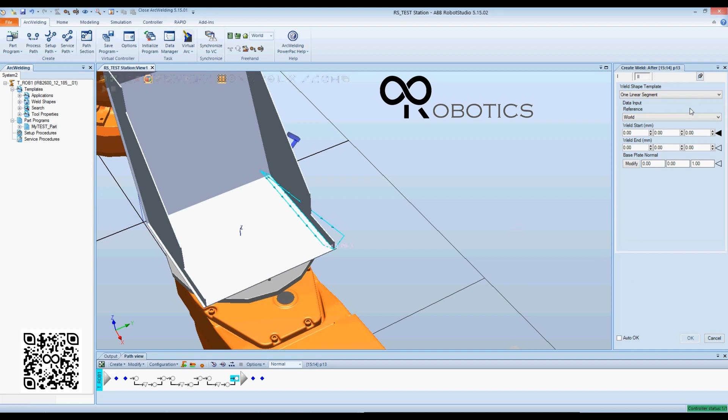So that's for creating linear segments. Now I'm going to go through to create circular segments. So to be able to create a circular segment, I've got to bring in something circular. So I'm going to bring in a new part, or a part that I created. Control J, circular. Open it up, and I'm just going to go on the Home tab and attach it to my positioner.

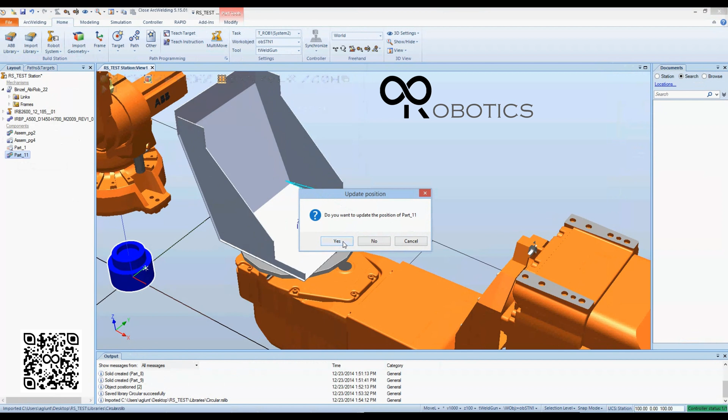Do you want to update the position? Yes. And that looks good there. So I'll hide this part, right click and hit V. So right click, visible, or right click V. I'm going to go through and just change some colors here too, really quick.

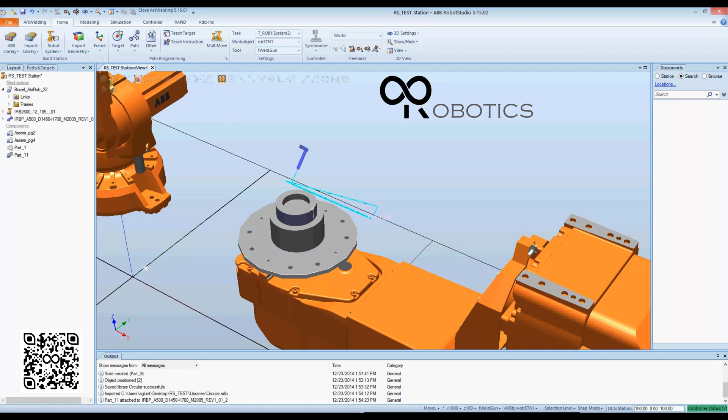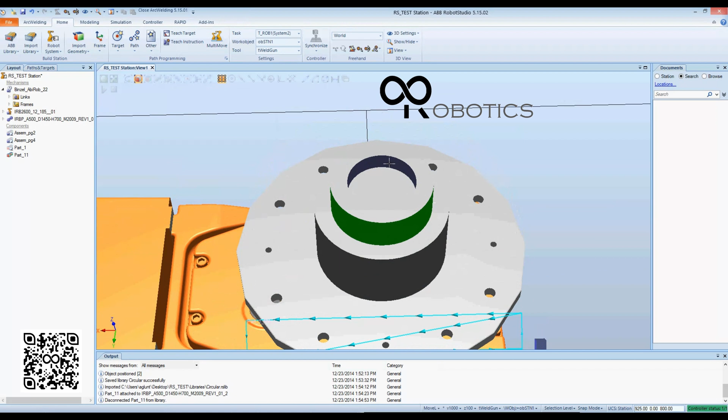So this is all one body on this part, so I'm going to right click this and disconnect the library so I can actually change the colors. Disconnect the library. So right click here, set color, make it green. On this inside, a little green as well. That surface there, and that surface there, and that surface there.

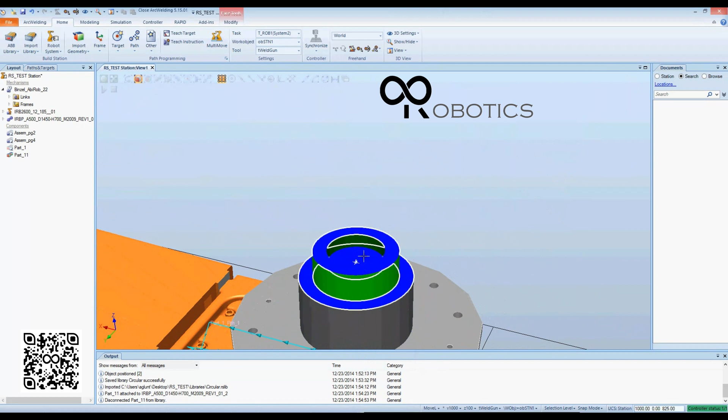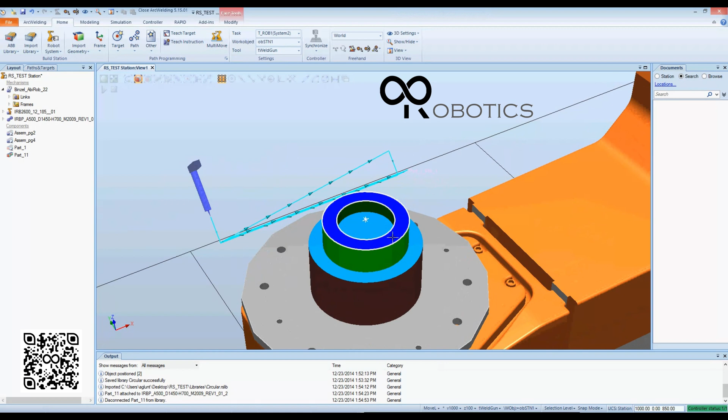We'll make colors orange, and actually we'll change that so it doesn't match the ABB color orange, or not as close at least. We'll choose a blue, and then this we'll make another color just so we can distinguish it from the platter a little bit better. Set color, make this brown. Okay, so these are our colors, and we might change this color just so it's a little more distinguished. Maybe a dark color. Okay, so there we go.

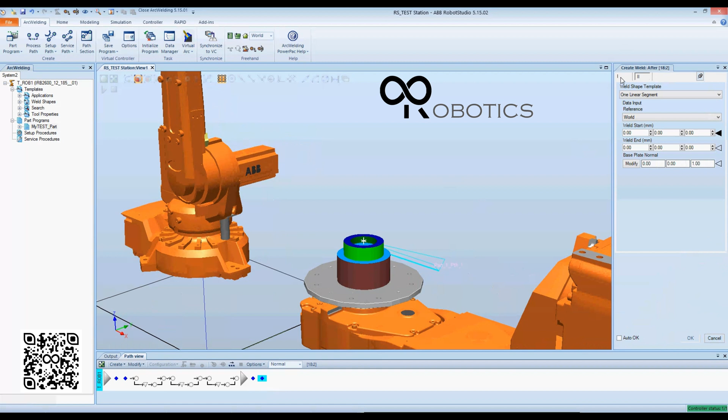So now to make a circle, I'll have the circle done in this path. As soon as I clicked here, that screen automatically closed. So create weld instruction. This is all set up still, since I haven't closed ArcWelding. I'll go to multiple circular segments. Usually if you're going to weld all the way around the circle, you want to start closest to the robot to have the torch wound up a little bit and then unwind as you go around.

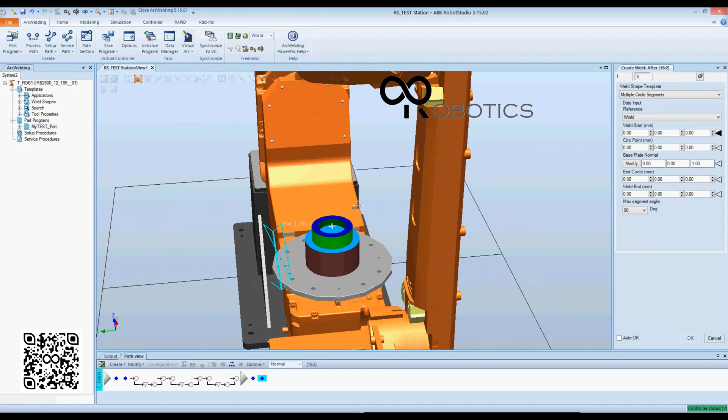So I'm going to start here, and when creating a circle, you've got 5 points to select from: a start point, a circular point, a base plate point, an end circular point, and end weld. So now, as I click here, there's the start point. That's where you want to start the weld. The circular point is just a reference of direction for where you want this circle to be going. So you select there. The base plate is the base plate you want to select, and depending upon where you select is going to change your torch angle.

So select there. End circular point. This end circular point does not mean the end of the weld, it's just the end circular point. Usually I do these first 4 within the first 90 degrees. You can even do it closer. I messed around with it a lot to see how close I can get them together before it messes up and does something different. So just within the first 90 degrees, these first 4 points, and you're fine.

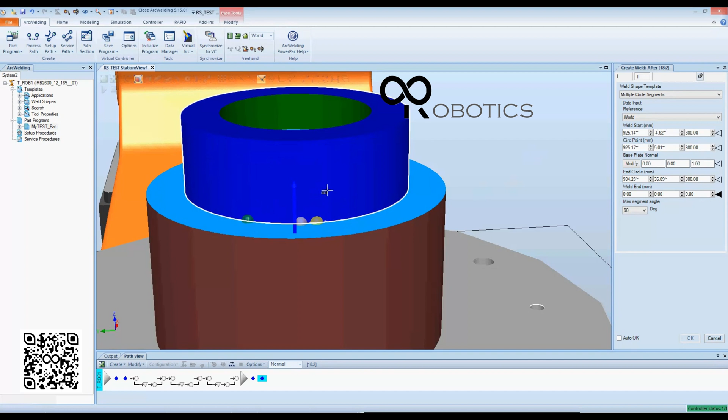And then the last point, the only thing it cannot be is at the exact same point as your first point. That's the only thing. You can have it over, you can have it under, doesn't matter, it just cannot be the exact same point. So I usually pick something right on the outside of that circle.

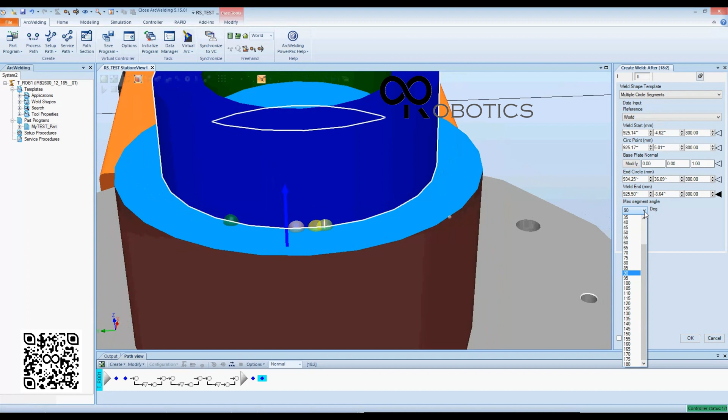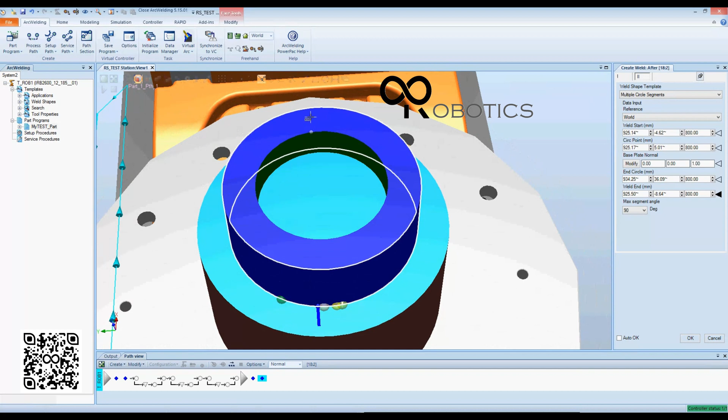And then here, this 90 degrees sets up how many sections you want it to be. You can increase the number of sections, so every 60 degrees you'll have your start point, and then every 60 degrees you have 1, 2 points, another 60 degrees, 1, 2 points, and so on. Or you can have 90 degrees, so you have your start point, and then every 90 degrees you'll have your circular point and end circular point, till the end of the weld.

So 90 is a good default. You can do less, you can do more. As the circles get bigger, or as the parts of your welding get bigger, I usually put more points in there. As they get smaller, I'll put less points in there. But you cannot go 180. It has to be less than 180, because otherwise, when actually welding it, you'll probably run into issues. So 175 if you've got really small stuff.

But 120 is probably pretty good. So then it'll cut it up 120 degrees, and so there, there, there, and then end. So it depends upon what you want to do. I'm going to leave the default and go 90. This auto OK button usually doesn't work. It might work, I think when you create work objects, but it'll actually close the screen, so it defeats the purpose of having this up here.

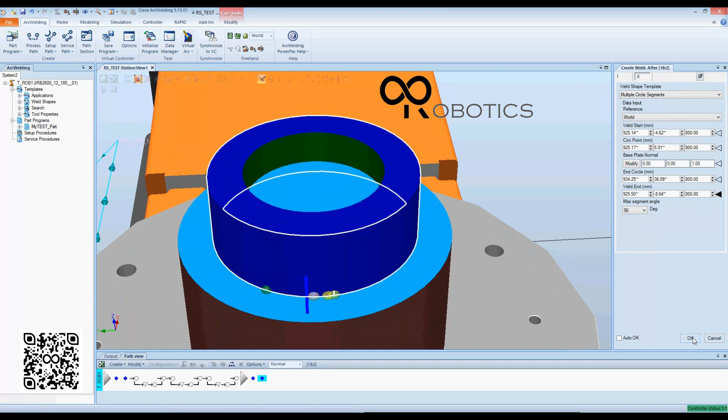And so since I've got this all set up, this OK button will only highlight once everything's been selected. Once it's all selected, I can hit OK, and I've got a path that goes all the way around, and I'll step through this, and I'm just using the over arrow as I step through this, and you can see what the path looks like.

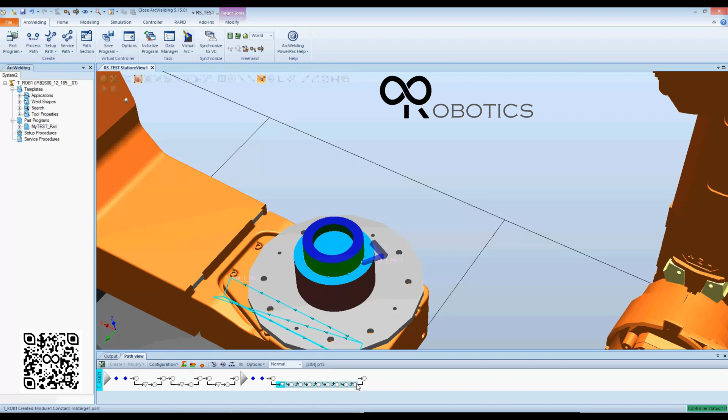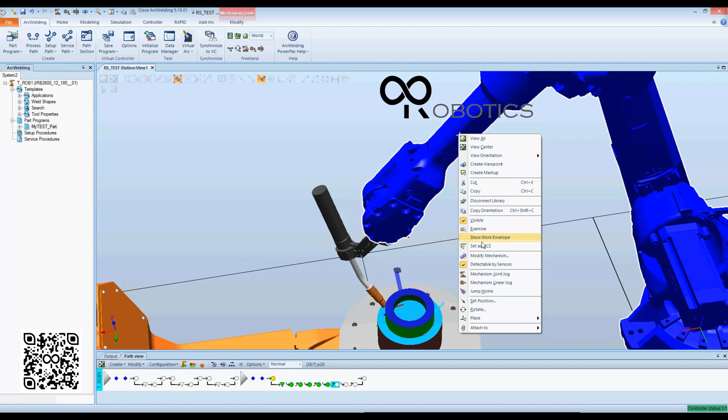So now to step through this path, you can shift and click all these points and hit move through and see what the torch looks like as it goes around there. Move to failed. Now the robot can actually reach there, but you're seeing this move to failed. Since I've got a quick tab up here, I can change this to mechanism, right click the mechanism and go mechanism joint jog. You can see that axis 6 is maxed out, so there's no more rotation around axis 6. So when doing circles, that's something you have to pay attention to.

And so you can go through and set the configs. So we'll go into configurations now with this circle. With a circle, or with any move, configurations can only be set on J moves. They cannot be set on L moves, because if you set them on an L move, as soon as you move from a J move through that L move, it'll automatically be overwritten by whatever the J move's configuration is.

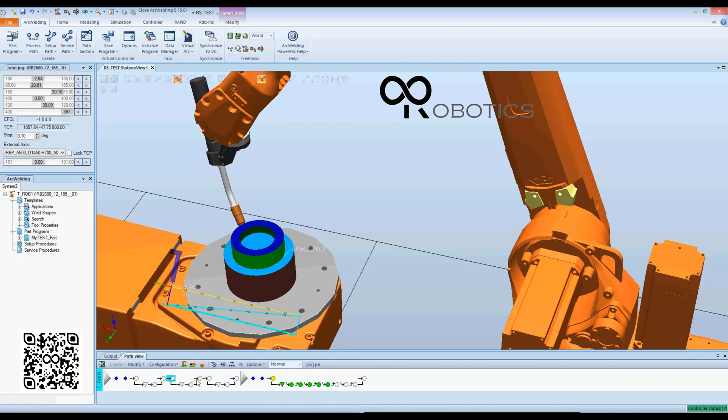So to set the configuration, I'm going to go to this J move. J moves are these little squiggly lines. L moves are straight lines. I can change these from modify, convert to linear. So there's a linear move. These end ones are linear moves as well. So this J move here, I'm going to go to configurations.

This button right here, set configuration, and these 3 buttons all pull up the same exact screen. So just pick any one of those, and as soon as you do that, the robot's automatically going to jump there, because with this config open, the robot will check the reach and jump to these points. So you can see from here, the robot actually can reach that point, but it said it couldn't. The reason why is because of this axis 6 value up here.

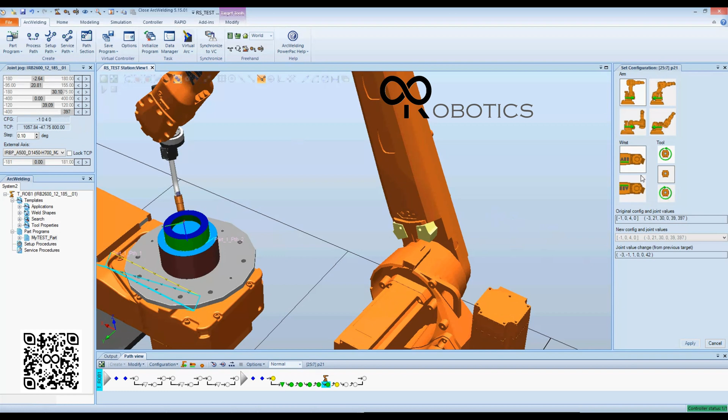So to set the configuration, I'm going to go to the J move. It's going to jump to it, and I'm going to set this configuration. This will tell you what the robot's approximate axis values are at this point: 0, 10, 42, 0, 38, 176. So I'm just going to make this a negative number. You pick this down, and then you've got a list of values here you can choose from. I usually try to minimize these numbers and then get the result that I want.

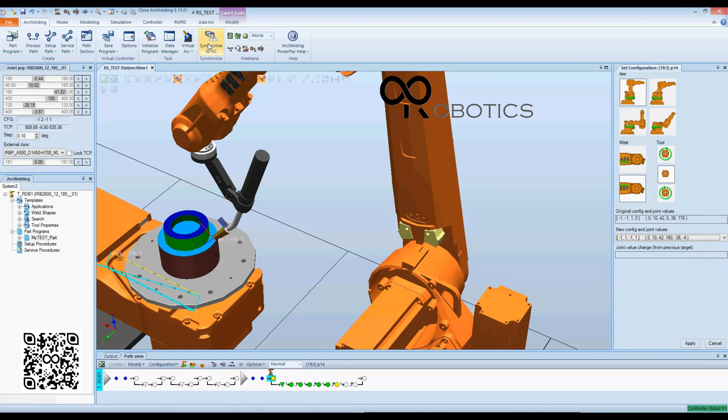The other thing is axis 6 most negative. You've got quick buttons to be able to do this. So I hit this, and see how it automatically jumps to the most negative value. You can go closer to 0. It isn't actually exactly 0, but the closest to 0 within that configuration. So you've got ABB up, ABB down. You can see what this does here. This is flipping axis 4. This flips axis 6. You don't see it except from this screen over here.

There's other things you can do if you have the ability. Some points you've got some weird configurations that you can use to get to those points. But I'm going to use ABB up. Generally that's what we like. And then I'm going to make axis 6 a negative one. You can either use these quick buttons, or you can use the drop down list to see what you want to do, and then hit apply.

So now you have to be careful though when you do set this up, and when you program, that when you move through these J moves you're twisting up this torch axis here. So I'm going to see what this move does here. So that one did okay, it didn't twist it up, but if I made this a positive one, let's just see what that does. As I moved to there, that torch flipped all the way around, and so it wound itself up, and then if I was going to start going around here, it won't make it because of that, and now it's starting to wind itself up more. So that's one thing you have to watch.

So fixing that config to make it a most negative also helped me with that. So I'm going to move that back, make it a negative, and shift and move through those again. So I go from there to there, and it looks good. So that's doing a circular move, and so I'm going to do another circular move on the inside here now.

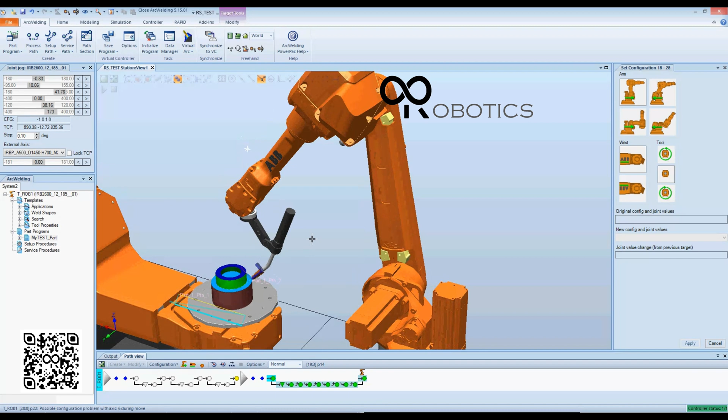I'm going to close this configuration screen and go create weld instruction, multiple circular move. And here I'm also going to start close to the robot, and I want to go the other way around now. So if I just wound up my torch, now I want to unwind it. So I'm going to go here, here, base plate, there, and then somewhere there. So there's my 5 points, and then hit OK.

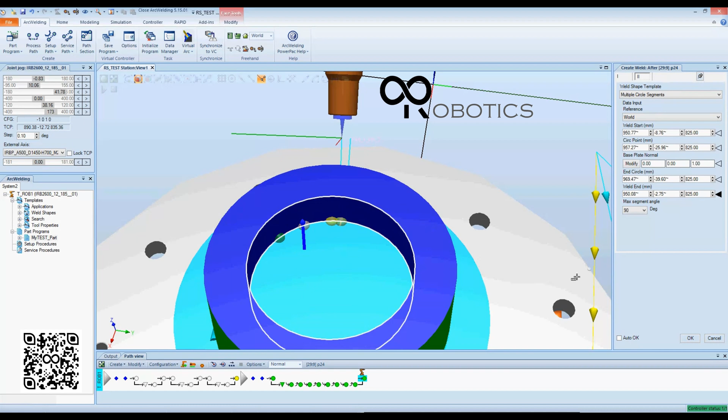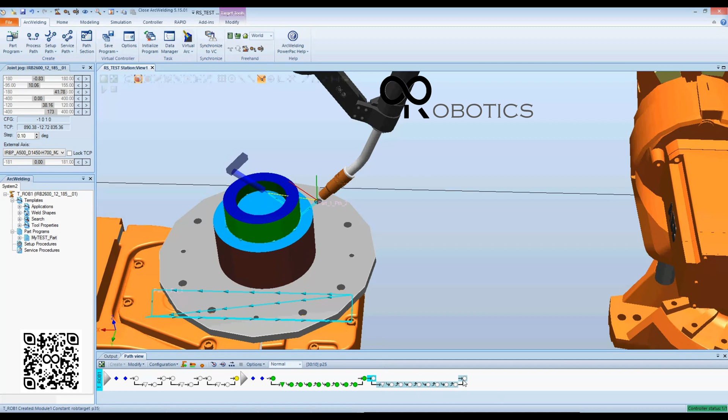So maybe that wasn't the best situation, or maybe I've got enough cable management there so that I can get around it. You can go through and change that, you can add more moves in, or you can say, hey, you know what, maybe starting at this location wasn't the best. So I can right click this and say that wasn't the best choice. So delete, yes. So I started there, I'm going to try a different one.

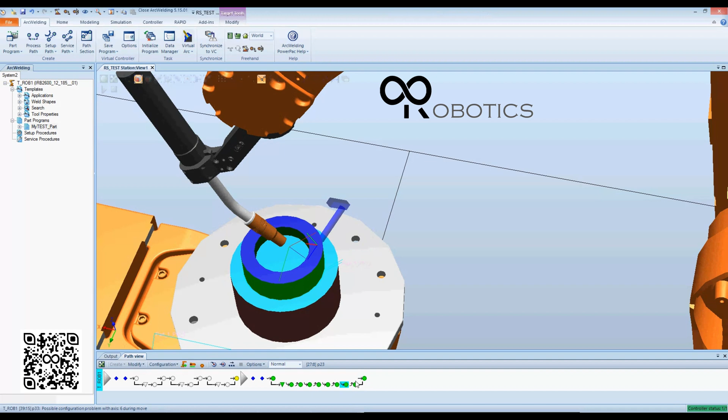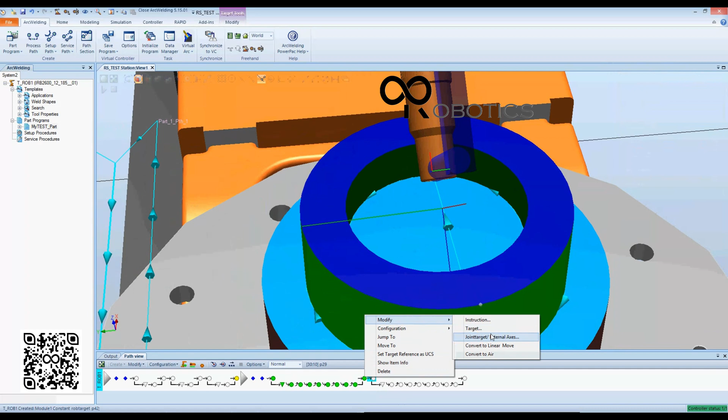Go create weld instruction and go here and go this way around. My torch is kind of in the way there, there, there. See how that works. Change this to linear. And see what that looks like. So there we go, that looks better. I went through the part, and I can then go through and add another air move up here, or do other things to make that get around there so I don't break my torch as I go around there. So that is creating circular moves.